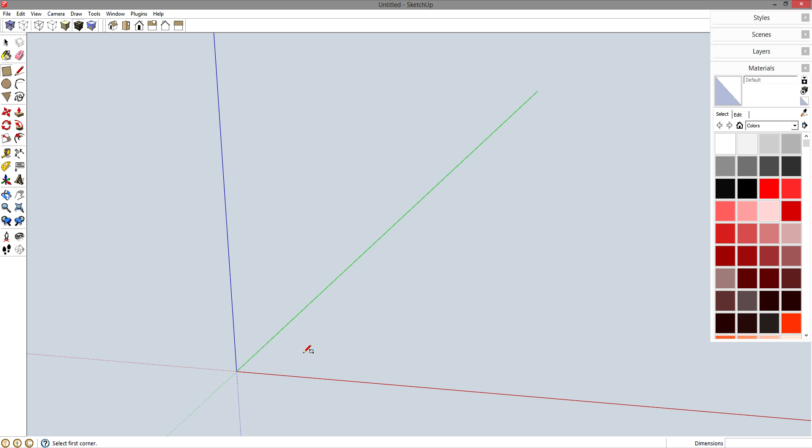I know my overall size that I want, so that's what I'm going to make first. I'm going to make a rectangle on the red-green plane, and the dimensions say the first one is the longer, and I know I want that one to be 18, 13. And I'm going 13 wide because that's the widest that my planer will accept. P for push-pull, and I want to go with a height of 24 inches, enter.

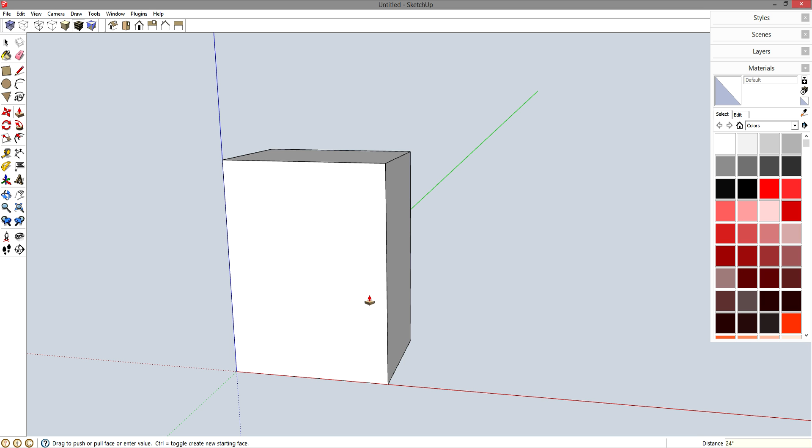Now this cube, box, 3D rectangle, all I want to do is just delete all the faces so I'm left with edges. I just clicked and deleted all those. Now if I triple click on the edge, the wireframe I guess you could call it, G for component, enter. Now this gives me the three-dimensional perimeter of my project.

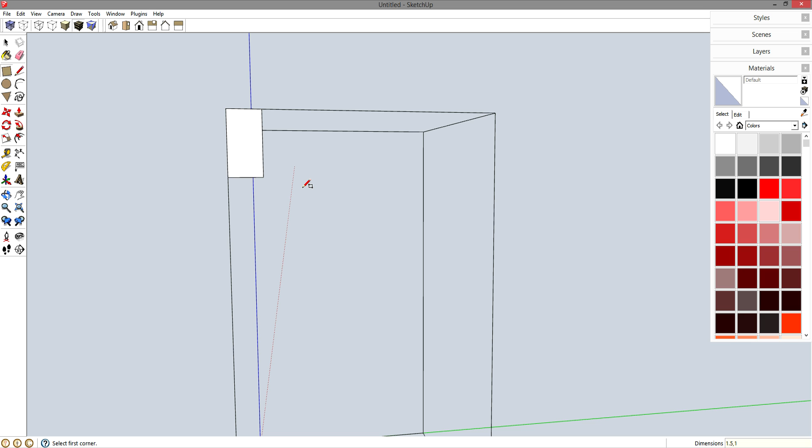From here I can draw the top of this, so R for rectangle from this corner, and I'm going to draw a rectangle. The dimensions say the first one is the longest, and I want to have a height of 1.5 inches, comma, 1 inch, enter. P for push-pull, and I've already determined my length, so I can just drag it to that back edge. Spacebar, triple click, G for component, enter.

Let's drop a little bit of color on here. I like to distinguish all of my parts with colors, that way you can easily look at the contrast and see that they are individual parts.

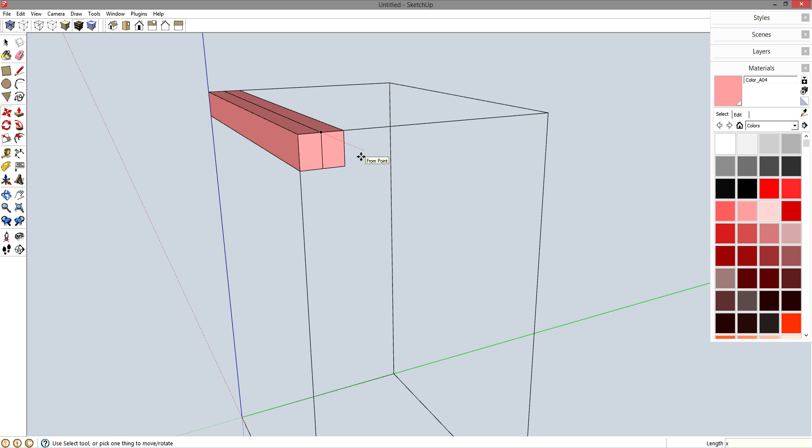M for move, control brings up copy, and this is going to be somewhat like a cutting board. It's going to be a multiple piece glue up for the top. We're making this entire project out of 2x4s. So I copied one and I didn't click yet, so I can say X12, enter, and that added 12 more to my original one, which is 13 inches long.

From here I can make the legs, and I know exactly where they need to be, so R for rectangle, and I'm going to draw a rectangle and then type in 1.5 comma 1.5, enter. P for push pull, and I'll pull it all the way to the bottom.

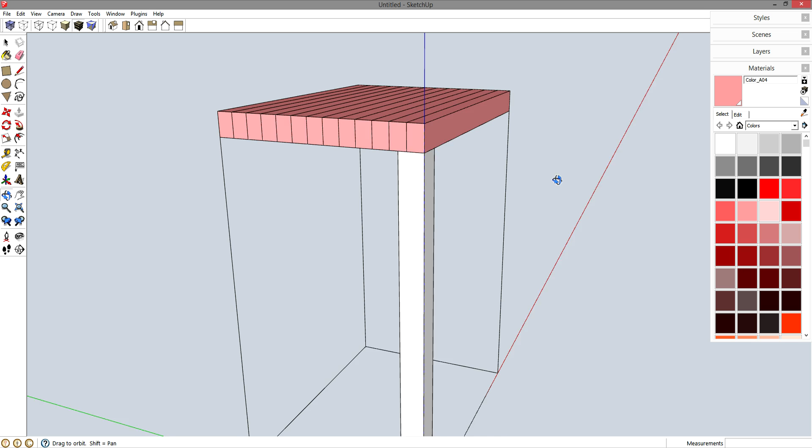But the way that this is going to work is, once the top is done, I'm going to cut a rabbet in the top to accept the legs. So I actually need to pull this up another 0.75 inches, which should be at that midpoint.

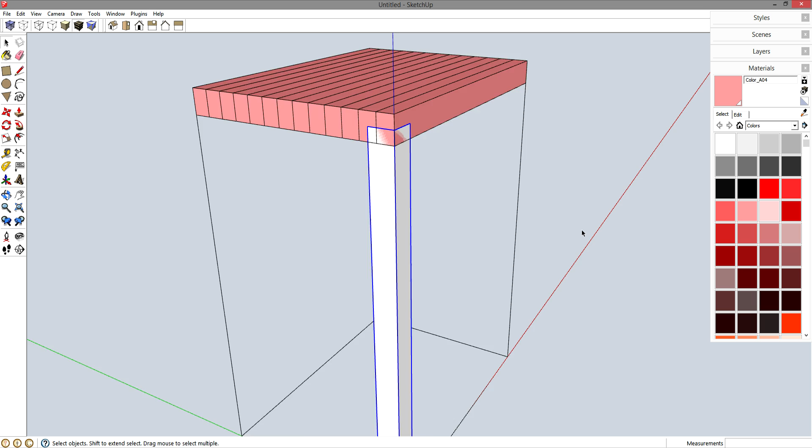Now I'm going to make all of my pieces first before I start to make any of the joinery. So spacebar, triple click, G for component, enter. And let's give this leg a color. Let's just drop green on it.

Now I'm going to be doing some copying, but I'm also going to flip so I have a left leg and a right leg. So M for move, control brings up copy, and I'm going to copy this to the other side, but I don't want two left feet over here, I want a right feet. So I drug it along the red axis so I can right click on it and say flip along components red. Now right now that did absolutely nothing, but when I go to cut the half lap on this side, it will update on the appropriate side for this leg.

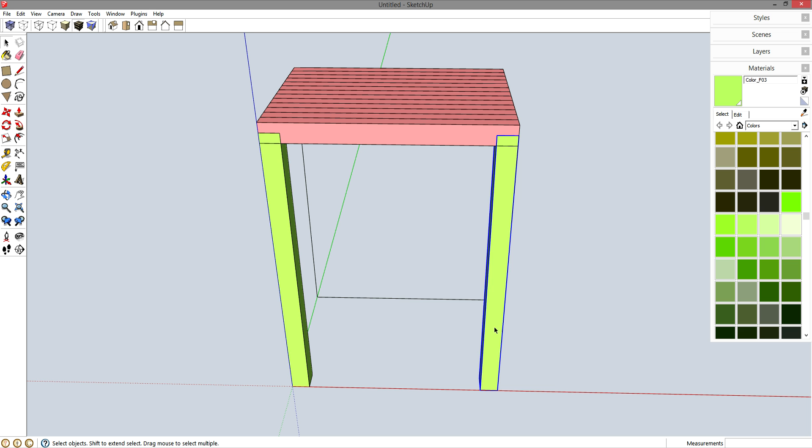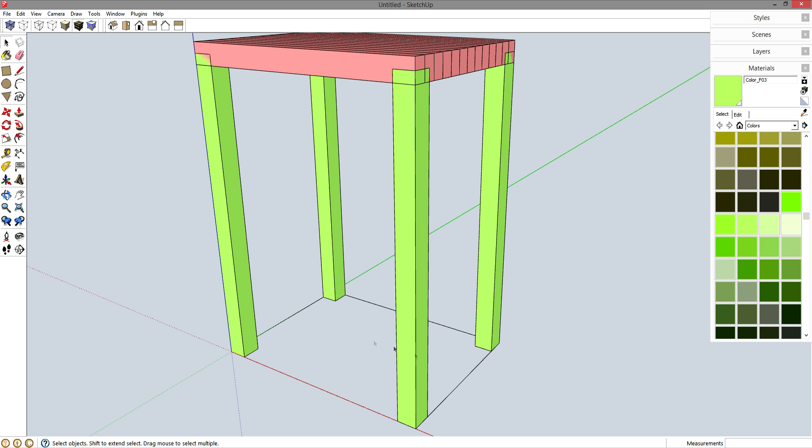So the same thing here, let's click both of these. M for move, control brings up copy, and I'm dragging these along the green axis, so let's right click and say flip along the green direction. Now again, that did not do anything as far as these square legs go, but once we make our joinery it'll all make sense. I want to connect these two legs with a half lap piece, so R for rectangle, and let's just draw a rectangle on here.

The first dimension is the smaller one, and that needs to be 1.5, so I can change that by pressing 1.5 comma and leaving the second dimension empty, that way it only modifies the first one. Press enter. P for push pull, and I'll push this to the thickness of my legs, which is a 1.5 by 1.5 inch square. Spacebar, triple click, G for component, enter.

Now let's drop some contrasting color on here. And I want this to be 6 inches away from the bottom. So T for tape measure, let's go up 6 inches, enter. M for move, and let's grab this corner and just pull it up to that new line that I just made. Let's select this and delete it.

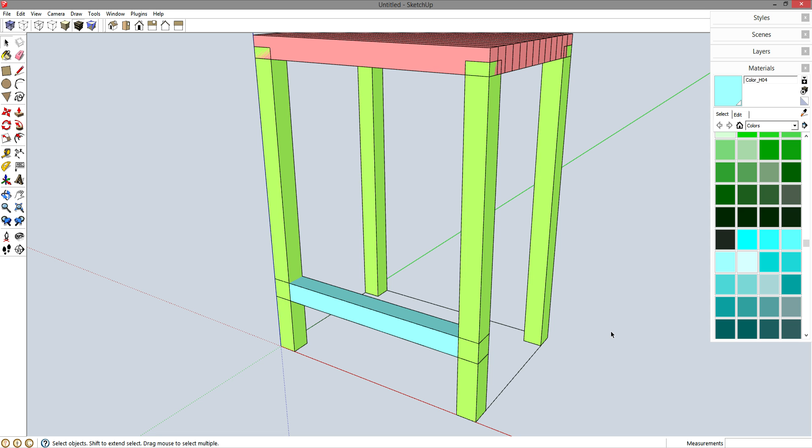Now I'm going to copy this one to the back side, but I also want one going from this leg to that leg. So R for rectangle, from here over to here, the first dimension is the shorter of the two, so I can type in 1.5 comma enter to only modify the first one.

P for push pull, and let's push this to the back edge of the legs. Spacebar, triple click, G for component, enter. Let's drop another color on here, just any old color will be fine.

T for tape measure, and I want this one to be just a little bit higher. If it's 1.5 inches tall, then let's put a half inch space in between the two, and that means this will be at 8. Enter. M for move, and let's move the top of this down to 8, and I can delete this line.

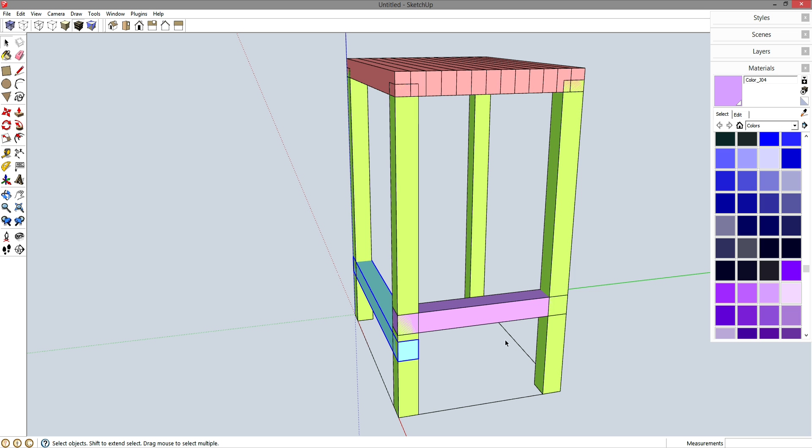So now I've got my two pieces that are going to connect the legs with no joinery cut in them yet. And to make sure everything is updated on the same side over here, I can copy this over to here and then flip it, and then copy this over there and flip it.

But an easier way when dealing with symmetrical pieces like this is to just draw a diagonal line from corner to corner, which gives me an exact center point. So I can select this, holding shift to select this, Q for rotate. Let's go from the center point, from one side all the way over to the other. But I want to leave the originals and make copies, so press Control for copy and drop them down. Now I can delete this line, it's no longer needed.

Now what that did was save me from flipping left and right, because I have left and right pieces, and everything should update once I make all the joinery here.

I also want to have a half lap and a piece going here. That'll give me a long grain to long grain glue connection, as opposed to a small end grain connection up here. So let's grab both of these blue pieces, M for move.

They're already in the appropriate orientation, so let's press Control, bring these all the way up, bring the copies all the way up to the top right there. So now the structure is complete, I just need to add my joinery. I no longer need this framework on the outside, so I can select it and delete it.

And let's first make the rabbet on the ends of this seat. So let's right click and say make unique — you are no longer a copy. Same with you. That way if I make any cuts into these two boards, all of these are not going to update.

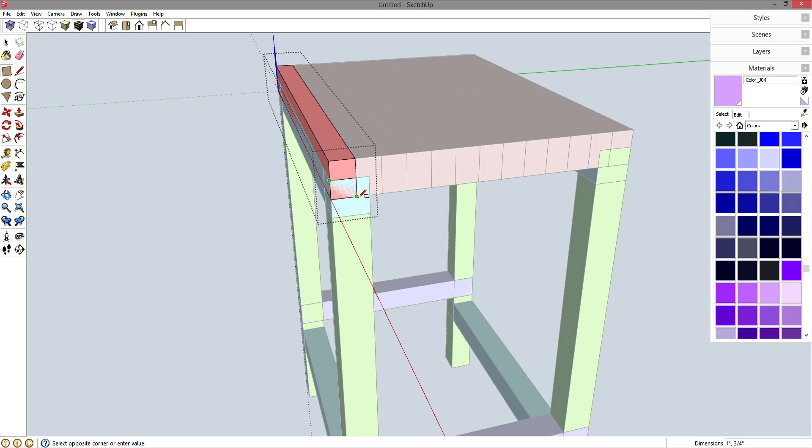Now let's double click to edit this part, R for rectangle, and let's make this rectangle, P for push pull, and let's chop this all the way to that back edge. Same with this one. Let's double click to edit this part, R for rectangle, make this little rectangle, P for push pull, push this all the way to the back edge. Now that made a rabbet along these two pieces.

Now these two, let's just go ahead and delete them, it'll be the easiest thing to do. And let's grab both of these. Actually, you know what, let's do that diagonal thing again. L for line from this diagonal over to this diagonal.

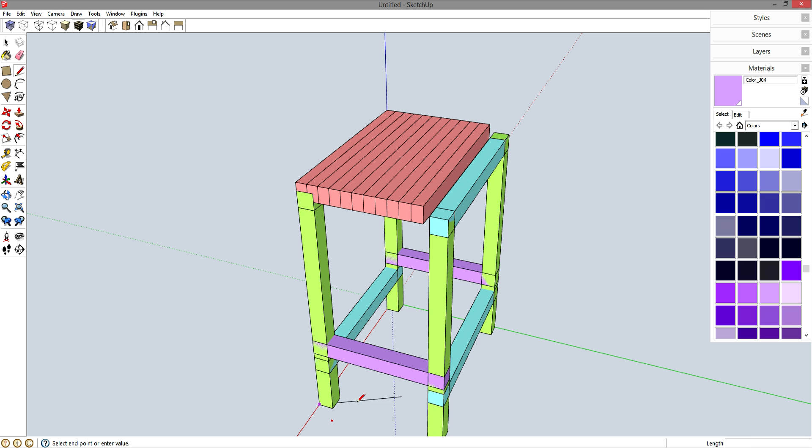Let's grab both of these. Q for rotate along the midpoint of my diagonal. And I'll go just like that, pressing Control to bring up copy. And there we go, I think that's it. So let's delete this line again.

Now let's make the half laps on our pieces. What piece do we want to be on the top of our half lap? Do we want the horizontal piece or the vertical piece? I want the horizontal piece, so I'm going to cut away at the leg.

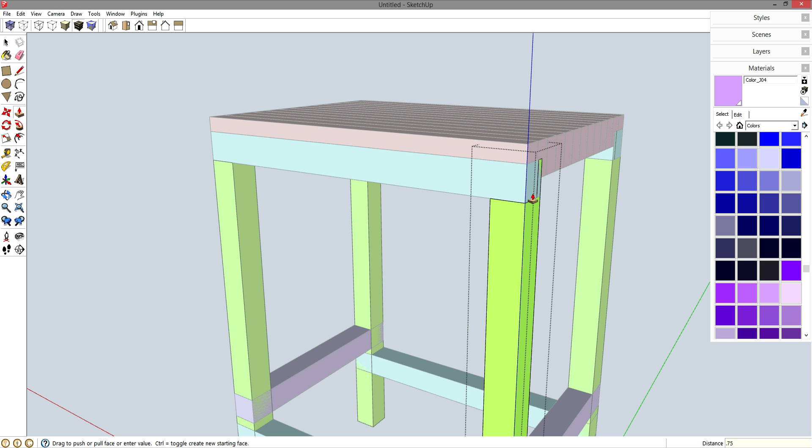So let's double click to edit this part. R for rectangle, and let's draw our half lap. P for push pull, and let's push it in half of the distance of 1.5, which is 0.75, enter. Now because I rotated all these parts in the appropriate orientation, all these legs, then all of the tops updated on the appropriate side.

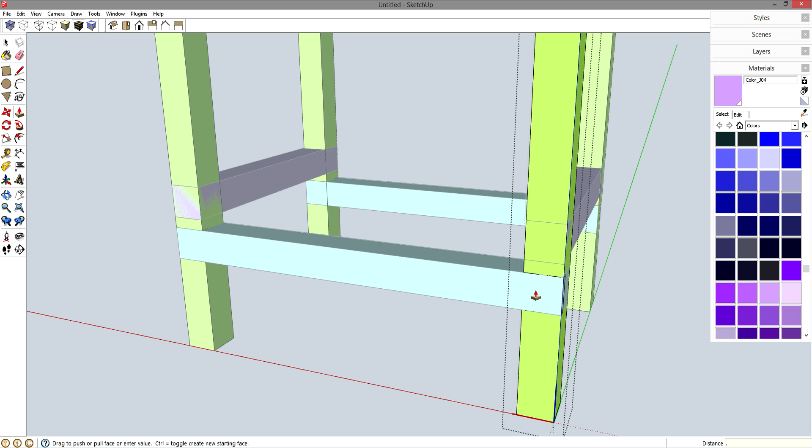Let's do the same thing down here with this horizontal blue piece. Let's edit the leg, R for rectangle, and I want to show the horizontal piece, so let's cut away at the vertical piece. P for push pull, let's push this in 0.75 inches, enter. And that looks good, same thing with these purple pieces.

I want them to be visible on the outside, so let's double click to edit this part again. R for rectangle from here to here. P for push pull, let's push this in 0.75 inches, enter.

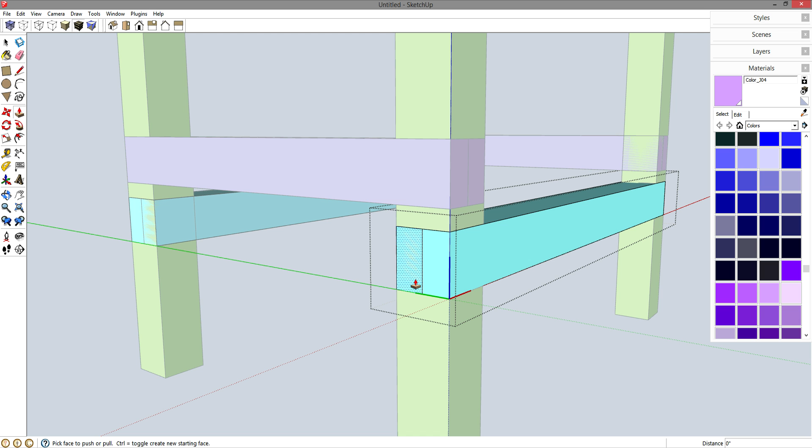Now all of these should have updated properly, and it looks like they have, but it still looks a little goofy, because we didn't cut out anything on the horizontal pieces yet. So let's edit this horizontal piece — if I want the front half to be shown, then I need to cut away the back half. So R for rectangle, this is half of the joint. Let's P for push pull, and push it in 0.75 inches, enter.

Let's go to this other side, R for rectangle. I just messed up, did I push that in? Yep, I only pushed it in 0.75 inches. Let's use P for push pull and push this in again 0.75 inches. I should have went 1.5 from the beginning. I'll do that on this side now.

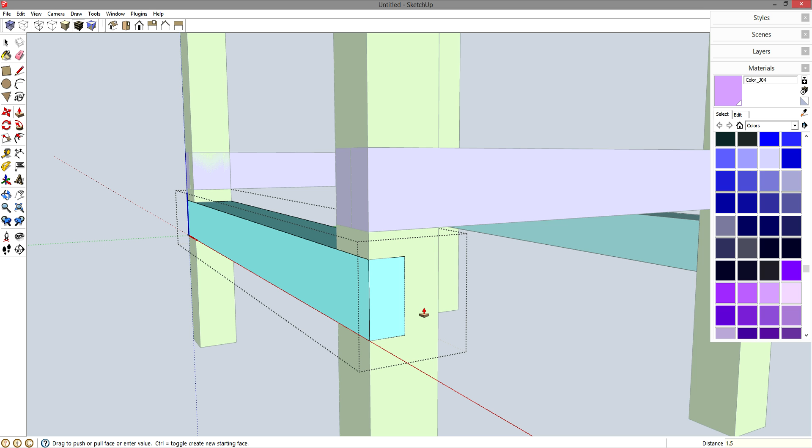R for rectangle on the back side of this joint. P for push pull, let's push this in 1.5, enter. What I did here was updated here, and now you can see the proper joinery of the half lap joint on these lower horizontal pieces.

Let's do the same thing with these higher horizontal pieces. Let's double click to edit the part. R for rectangle on the back side of the piece. P for push pull, let's push this in 1.5 inches, enter.

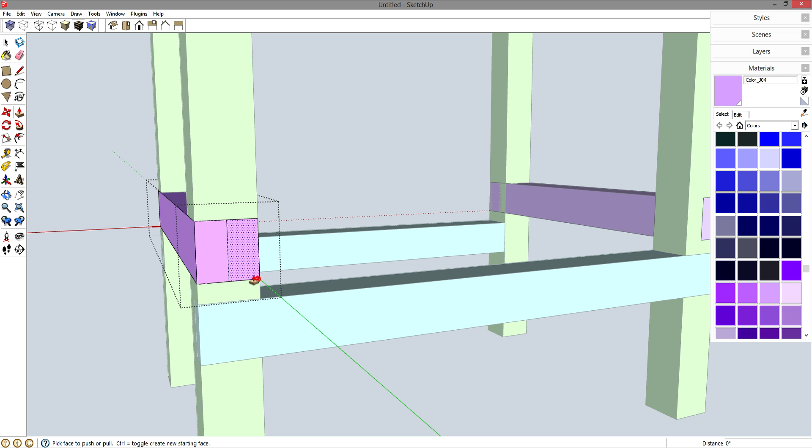Let's go to the other side. R for rectangle from here to here. P for push pull, let's push this in 1.5, enter. And that should have updated over here, which it has. It's a half lap joint. Make sure all of my joinery looks okay.

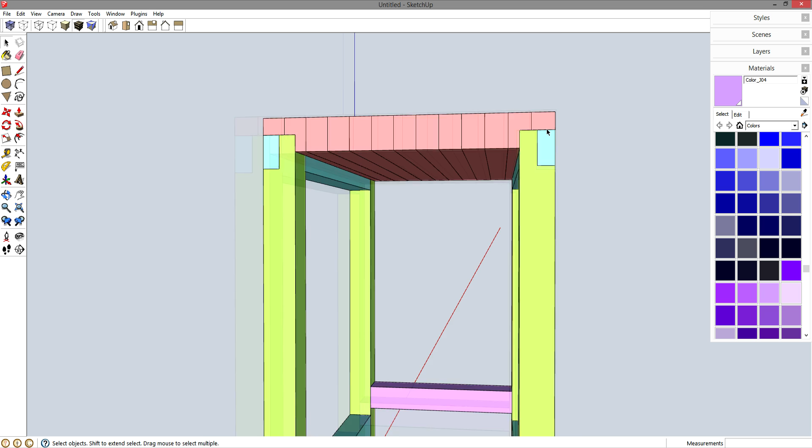And it does. So this is the no mechanical fastener bar stool. This rabbet here on the top edge gives a nice wide long grain to long grain glue connection, which will be very strong on not only this edge but also on this back edge as well, on both of these leg assemblies. Now, what you have to be worried about with using solid wood is obviously wood expansion and contraction.

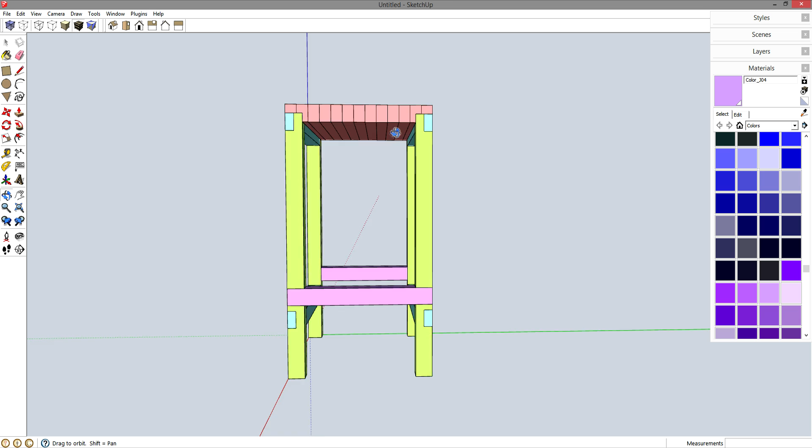I'm going to make the top, cutting board top, whatever you want to call this, hopefully keeping all of the grain vertical so that the most expansion and contraction will be vertical and not horizontal. But the reason why I only have runners down here on this particular side, and not up here like this one on the sides, is because even if this does expand and contract this way, this one single horizontal piece down here will act as a pivot point.

So I'm going to exaggerate it a little bit. What I'm saying is if the top shrinks, then the leg will come in just a little bit, and if it expands, it'll come out just a little bit. Because I only have one horizontal piece going this direction, it'll act as a pivot point, and the wood will bend slightly as needed.

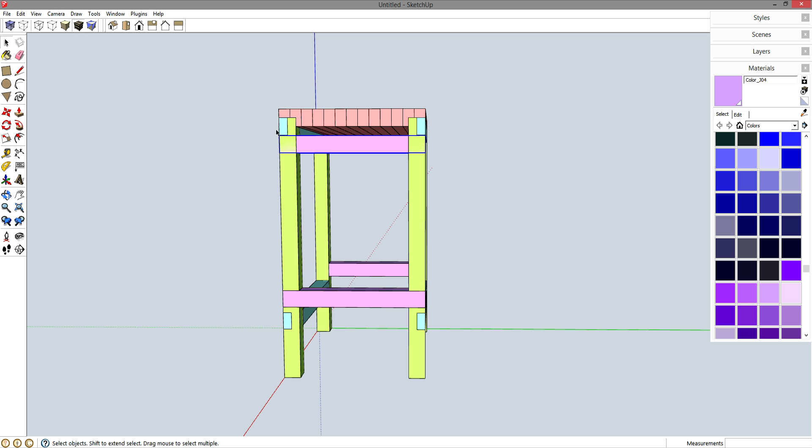If I had another piece like this up here, let me go back to it. Had another piece up here, then both of these would prevent this leg from bending in or out. So that's what I'm going to be banking on as far as this thing holding up over time. I don't see any problems with this, and hopefully it'll be fun to build.

Now, before I call it quits with this particular model, I do want to make it a little bit more realistic as far as what I'm wanting to do with the final product. I do want to soften up all of these edges, and the way I'm going to do that is either a roundover or a chamfer. I'm not exactly sure yet, but to represent it here, I'm just going to use a chamfer.

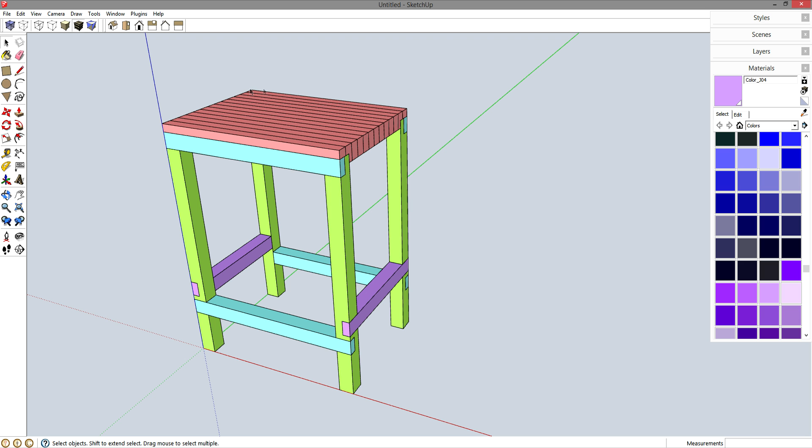However, I do not want to mess up my original model here, so let's copy all of this. Select it all, M for move, control brings up copy, and I'm going to copy the entire project over to here. Now, it is a copy, so what I do over here will be updated over here. However, it's still selected, so what I can do is right click and say make unique. This entire assembly is now unique from this entire assembly, in the same instance as if you would do a single component. But each one of these still remains a copy of one another.

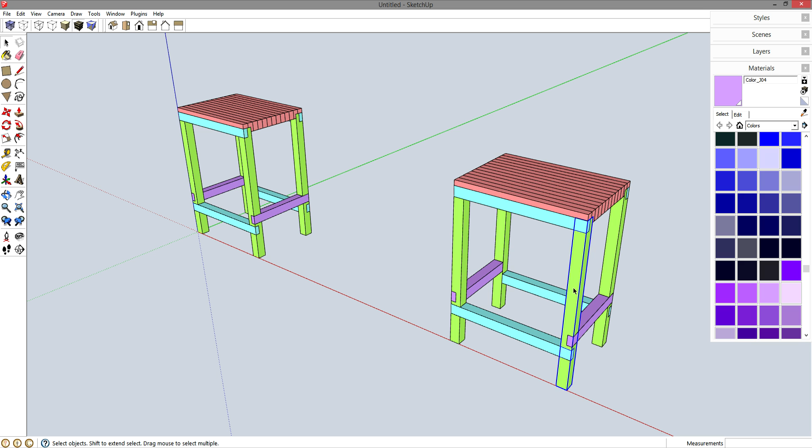So basically, if I edit this part over here, P for push pull, it's only going to update this particular bar stool, not this one. So with the entire thing selected, you can make that whole copy unique from this whole copy. I hope that makes sense. I don't want to modify this one because this gives me the exact measurements, and the final edge detail really isn't that important as far as the plan goes. So from here, I can make all of the adjustments that I want.

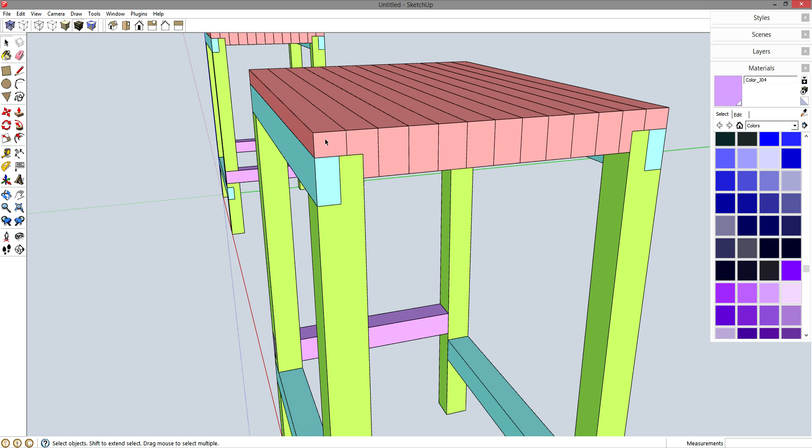The easiest way to show the edge details is just with a simple chamfer. So let's edit this part, R for rectangle, and let's make a half inch chamfer. So 0.5, 0.5, enter. Whoops, wrong plane there. Let's go 0.5, 0.5, enter. That just basically gave me two points to connect here. I can delete this other half. P for push pull, and I push this all the way to the back edge. That gives me a nice chamfer.

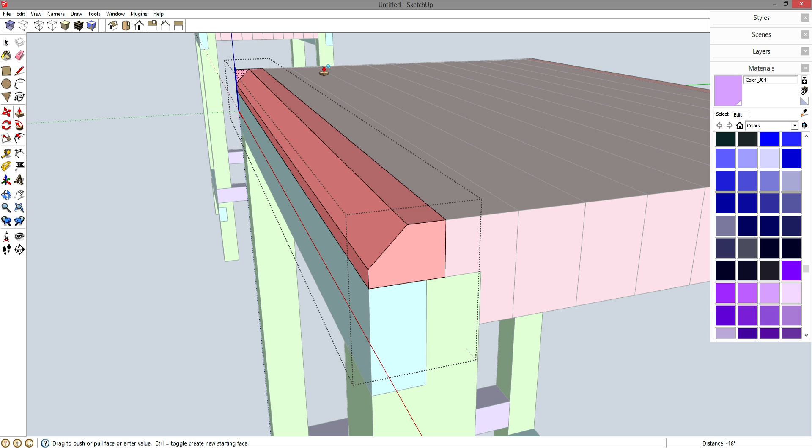Now to make a chamfer going this direction, all I need to do is L for line and make a horizontal line right there. Select this line, M for move, and let's move this in the same distance as our chamfer, which is 0.5 inches. Enter. Let's go to the other side and do the same thing.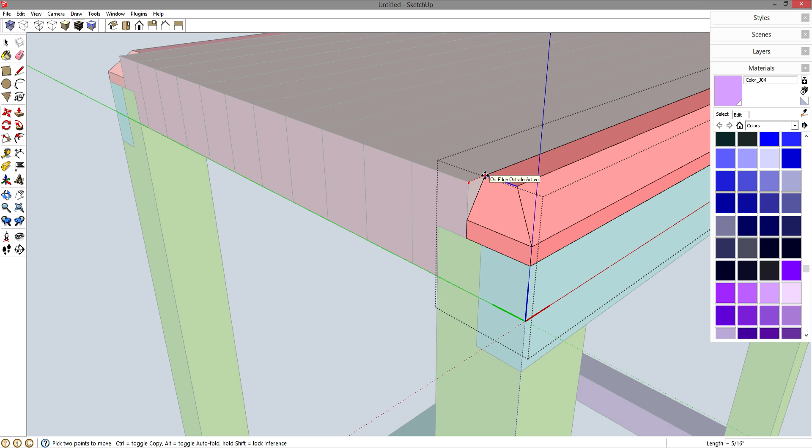L for line, making sure we stay constrained to the green axis. Let's select this, M for move, and let's just push this in 0.5 inches. Enter. Now from here I've already got my shape, so all I have to do is edit the next part.

L for line, let's connect the dots, P for push pull, let's push this through. Spacebar, double click to edit the next part, and repeat the process. L for line, connect the dots, P for push pull, let's push this all the way through.

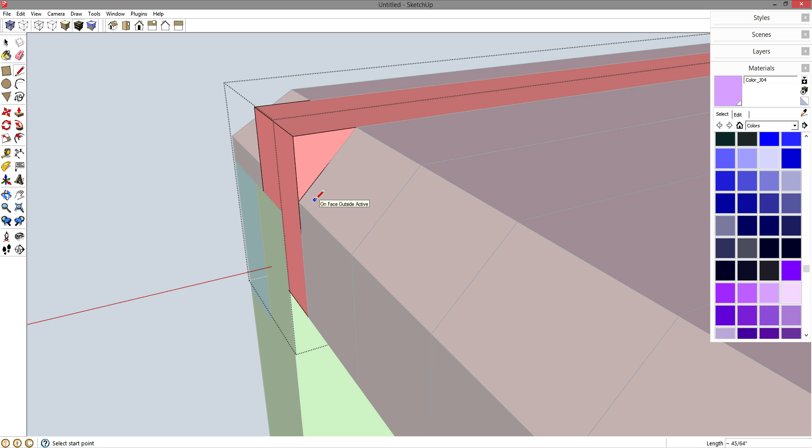Now we just have a couple more to do over here. Spacebar, double click to edit the part. L for line, let's trace this one more time. P for push pull, let's push this in all the way.

I think we got a couple more on the other side. Yeah, here we go. Spacebar, double click to edit this part. L for line, let's go from here to here. P for push pull, let's push this all the way in. And the top is pretty much done.

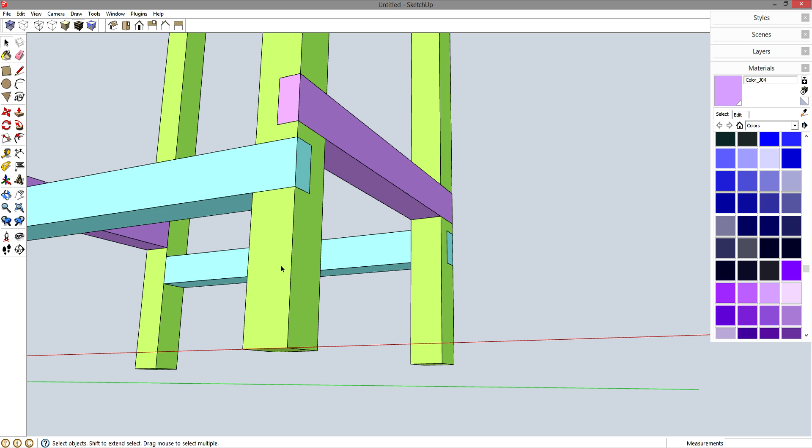Let's do this outside edge on all four legs. Kind of the same principle here. Let's double click to edit this leg. Let's select this vertical line, M for move, control brings up copy, and I'm going to copy this line 0.5 inches, enter. Select the original line and let's move it 0.5 inches, enter. That just created a little chamfer right here.

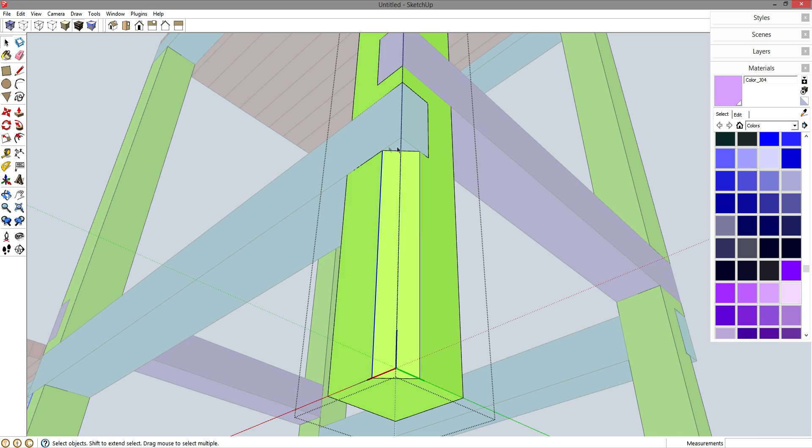If I look down that chamfer, I can just trace my line again just like I did previously. Let's double click to edit that part. L for line, let's trace the chamfer. P for push pull, let's push it all the way. Let's spacebar, double click to edit the next piece. L for line, here to here, P for push pull, let's push it again, and just keep repeating the process.

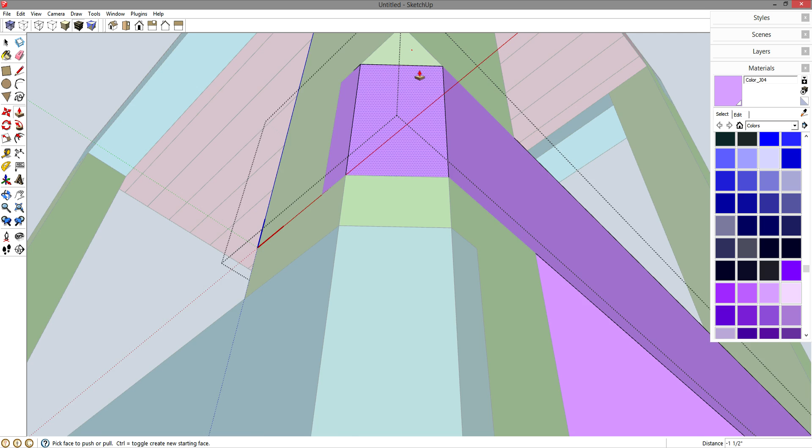All the way up to the top. Now, let's get out of here. Because this piece and this piece are copies, I've already made this chamfer right here, which means it updated right here. Let's go to the top, and this is the only little tricky spot, which it's not really too difficult at all.

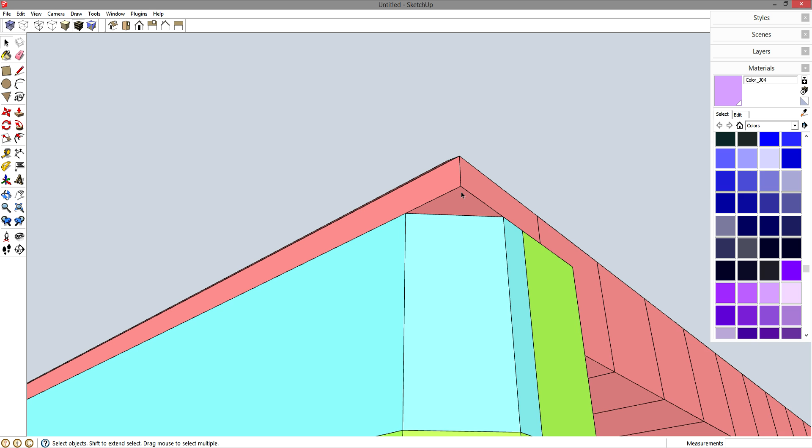Let's double click this part, L for line. You just got to think of the way that this is going to end up if you do it in real life. So let's P for push pull, let's push this all the way to the top. And SketchUp says I can't go any further because I've got a point out here into space, and that'll create some weird geometry.

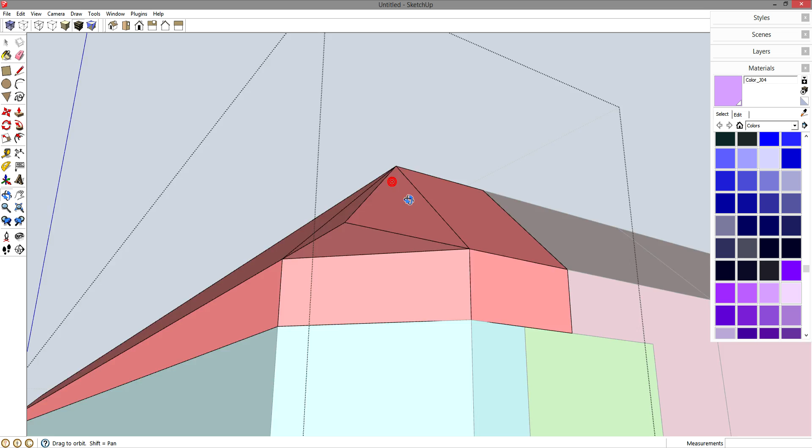So let's just L for line to connect these dots here from this point up to here. And if I go to the view where I can use a crossing to select all of the area plus the outside edges and just delete it, then when I created this line and this line, it actually created this face. So now I can repeat the process over here.

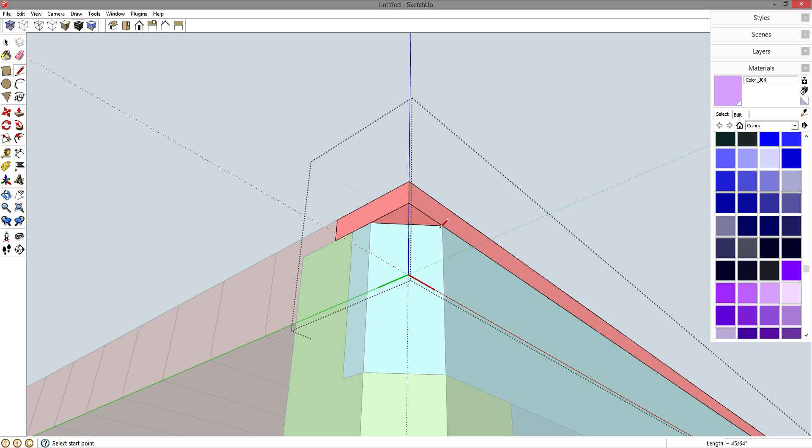Let's double click to edit this part. L for line, P for push pull, push this away, spacebar, double click to edit the next part, L for line, let's drop a line there, P for push pull, let's push this up, and L for line, you got to make these lines first, if not then you'll lose all of these faces.

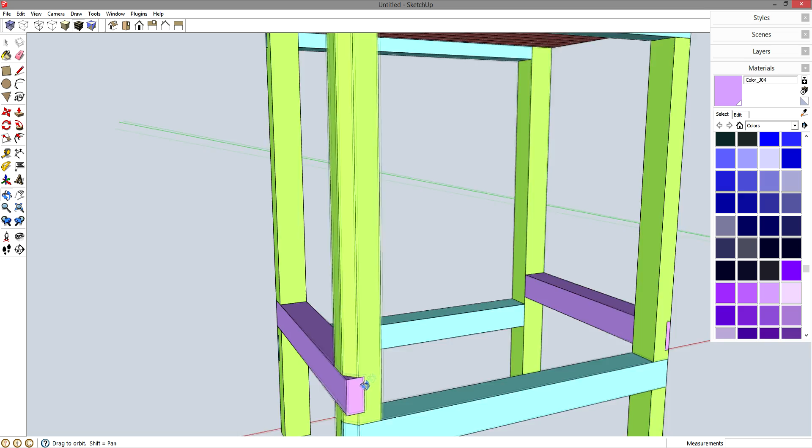So let's spacebar, use a crossing to only select that, which is what we want to delete, press delete, and there we go. Let's see if I missed anything. The purple pieces on this other side. Let's double click, L for line, P for push pull, and there we go. I believe that's it. That's a nice chamfered edge, or you could use a round over bit.

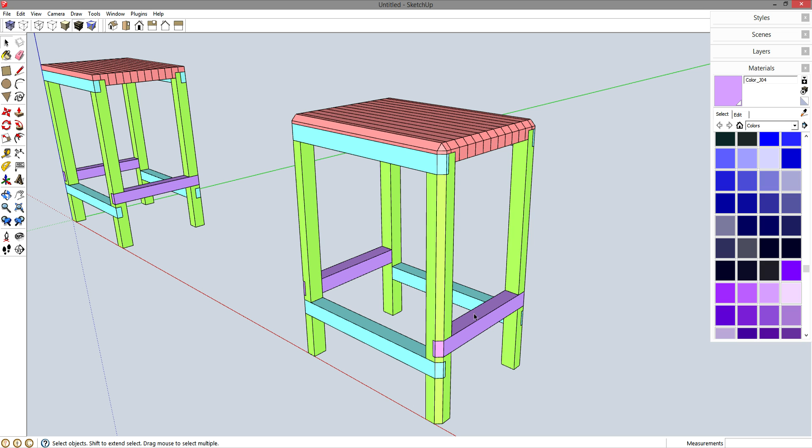I'm not exactly sure which one I'll use, but it's a greater representation as far as the end product goes. But we can take that just a little bit further if we want, and let's go to our materials, or B for paint bucket, and let's change the colors to wood. And let's first select all of this. Let's change it to wood, and that's pretty much the color I'm going with. We're not going to see all these harsh lines, so let's select it all, right click, and say soften/smooth edges.

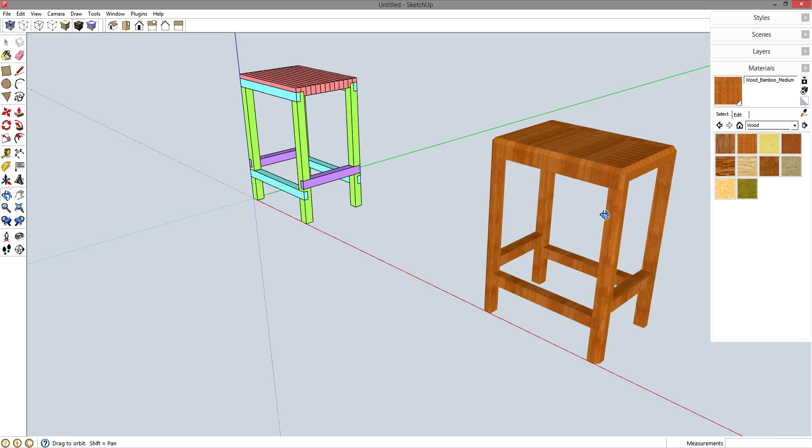Now all of these are 45-degree angles and a couple 90-degree angles, so if I was to go all the way past 45 and then past 90, things get kind of soft, obviously, for soften smoothing edges. Let's uncheck smooth normals and see what that does. I guess that's okay. And that is a little bit more accurate representation of how the bar stool will turn out, hopefully. That's the game plan anyway.